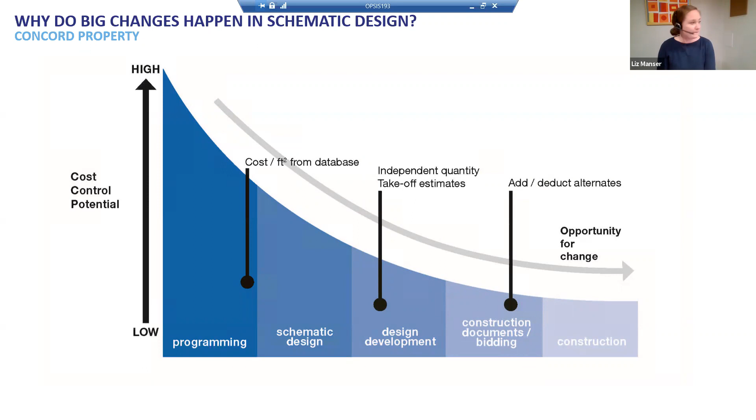This is another graphic of schedule, but I really wanted to use it to talk to you all about the touch points we've identified to come back and talk to the task force group. We've picked 6 times, but they're not evenly distributed through the design schedule. They're really more clustered towards the front end, because that's when the design is changing the quickest, and we want to make sure we have enough feedback from you all and keep you in the loop.

So the way we've broken it down is 3 task force meetings during schematic design, then 2 task force meetings during the next phase, design development. Then we'll have a little break and meet again during construction documents, where we can see where the project has ended up and where the designs landed. And obviously we'll all meet again during the groundbreaking and grand opening.

So just to give you an idea of what we're looking at during those 3 meetings identified for SD, and what the topics of conversation would be: today we're in the yellow meeting, the beginning of SD, where, like Doug said, we're going to review the comments everybody made at the end of the master plan, both from the task force, from NCPRD, and from the library, and share how we're starting to respond to those and how they're affecting the design. We're also going to select the sustainability subcommittee member.

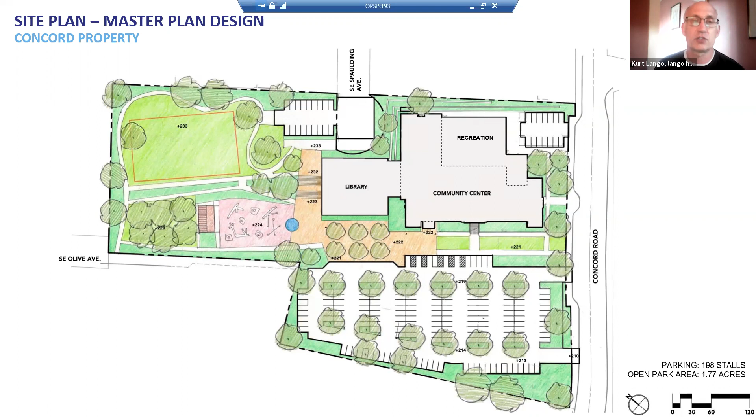So looking at all of that, I think the next plate shows a little bit about what some of the challenges are. Each one of these lines represents a 1-foot contour, so there's about a 20-foot grade change from one side of the site to the next. And we're having to meet up at the property line on all 4 sides, so it's a bit of a puzzle trying to get it all to work together.

We're also trying to balance the cut and fill on the site, so we don't want to haul off a lot of dirt at great expense, or bring in a lot of dirt at great expense. It's a balancing game we're looking at right now, just starting out, and it all seems to be working so far in creating accessible areas and accessible ramps where we need them.

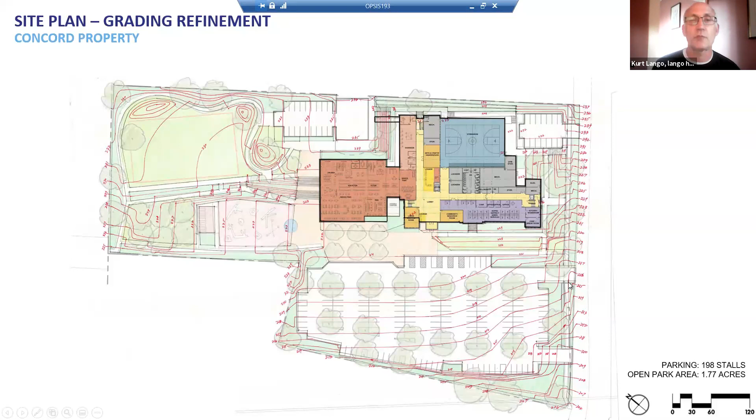I think early on there was a lot of discussion about creating an inclusive play area. What that means to us is creating play elements that serve children of all ages and all abilities, creating areas that might be a little more sheltered for kids within the range of autism, and creating areas that are accessible for kids of all mobilities.

This is a diagram that shows, within the dark outline, the area at the ground level of the Concord School. In purple is dedicated space for NCPRD, and in the light rust color is dedicated space for the library, which is about 3,000 square feet. In yellow is shared space between NCPRD and the library. Totaled together, that's about 7,000 square feet.

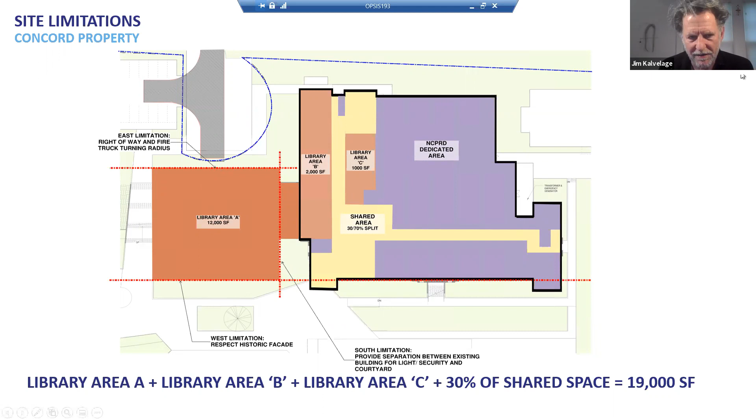So we can continue on here. This is the plan as we left it at the master plan phase.

One of the things we started to look at, a comment we kept coming back to, is how close is this vestibule to the main monumental stairs. The overall notion of having an entry in the knuckle of the L we all agreed to, but the actual design being as close as it is to the monumental stairs, we started to question. Also it being an element that extends out from the facade — when you look at patterns of entries being recessed into the facade, it seemed to us somewhat foreign.

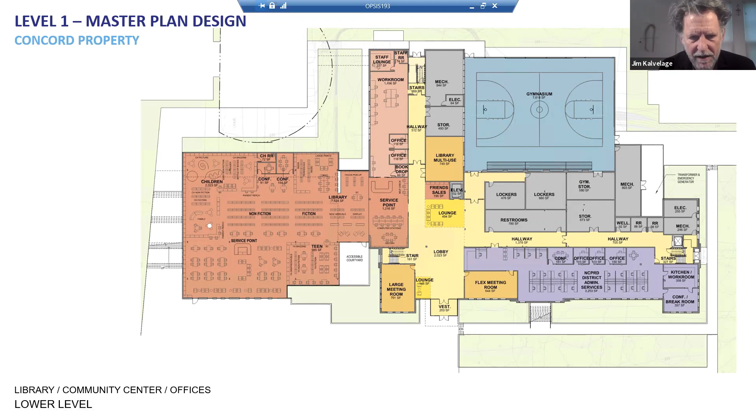Other considerations we'll look at more carefully have to do with the locker room and restrooms layout. But the thing we really want to focus on here is the entry. So let's go to the next slide.

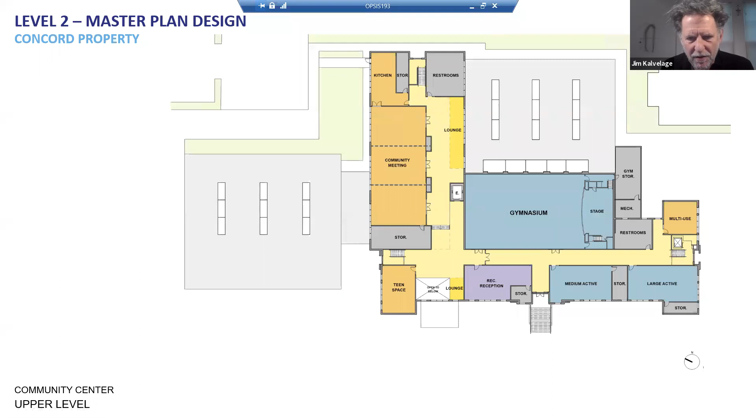Yeah, we can go to the upper level. Subtle changes up here. This is the original plan, and what we've started to do now is really dial in a little more detail of storage needs for the community room and restrooms. We can go to the next image.

You can see the community room. We created larger gray storage blocks that might even have sink and storage to serve each of these three separate rooms, with restrooms at the end of the hallway. We started to even consider, conceptually, the kitchen and its layout, and the potential for a service bridge - more of a pedestrian bridge where you could pull up behind the library and a caterer could bring food directly into the kitchen, since that's up at the upper level. So that's a consideration we need to think about.

And then the lounge area will overlook the gym space below. Other considerations we've given are a second means of egress into the gymnasium - there might be an entry door into the gym, and as you come up the stairs and look straight across you see that entry door. We're also providing after-hours security to the south wing of the upper level, making sure recreation staff have really good monitoring and supervision, something we talked about before. They can also monitor from the monumental stair if the doors are open, with glazing there as well, so they've got an ideal location to supervise this upper level.

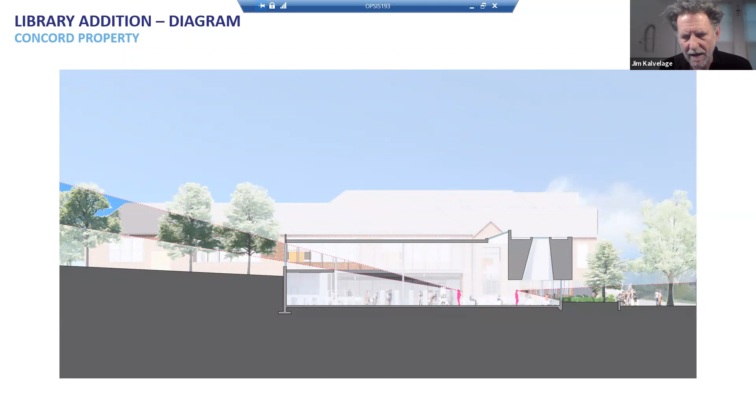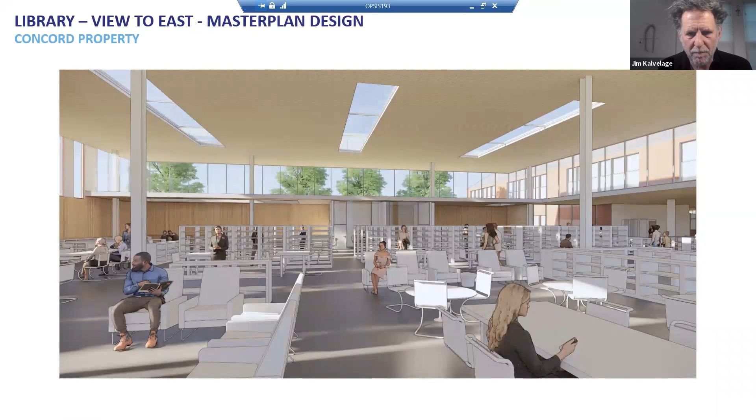This is kind of where we were on the interior view. Should look kind of familiar. We are looking at cross-laminated timber for the roof structure, and then a lighter steel frame that would support that CLT. In this case, we were dropping in skylights, but it was really more of a placeholder.

The next view shows a bit more refinement, bringing that ribbon of clerestory windows and wrapping it around on the north side of the facade. Previously we were showing more windows or solid wall there, so now it's really simple and clear about that clerestory window around the perimeter. As Ray was saying, extending that lower datum line of a ceiling around the north side of the library. This is also starting to show a little more clarity about the structure with steel columns and beams.

We're looking at a moment frame. What that means is the connection structurally between the beam and the column is very rigid, so we don't need a lot of diagonal bracing or cross bracing at the perimeter. Our structural engineers are very excited about how to do this with a more off-the-shelf connector that is very affordable, but allows us to get that rigid connection in a really affordable way.

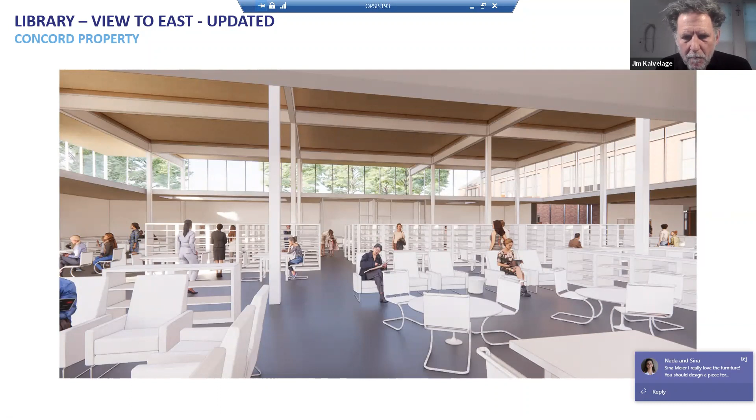And then there's some other views. This is a good one because you can see, looking towards the north and the west, this vertical pattern of windows. That's something we've started to take a closer look at in terms of what is the appropriate character to work with the Concord School.

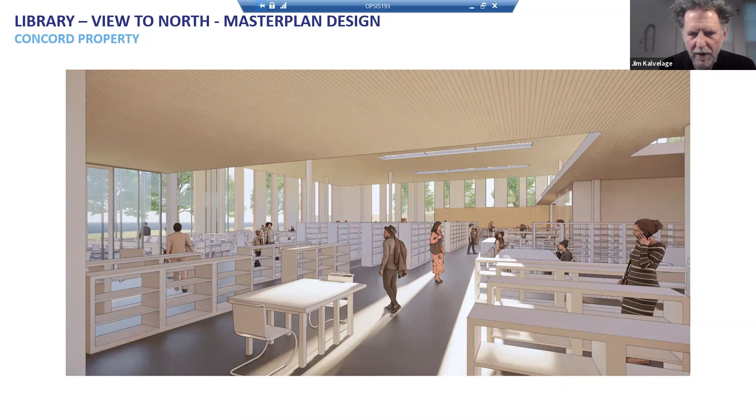So the next view shows the idea of that clerestory window. Let me go to the next one. Yeah, it shows the clerestory window wrapping around that lower extension of the lower ceiling that Ray was referencing. That's part of the children's area, and it terminates at a meeting room. Then that clerestory window wraps down into a 2-story window opening, and that's where we would probably have our secondary egress location.

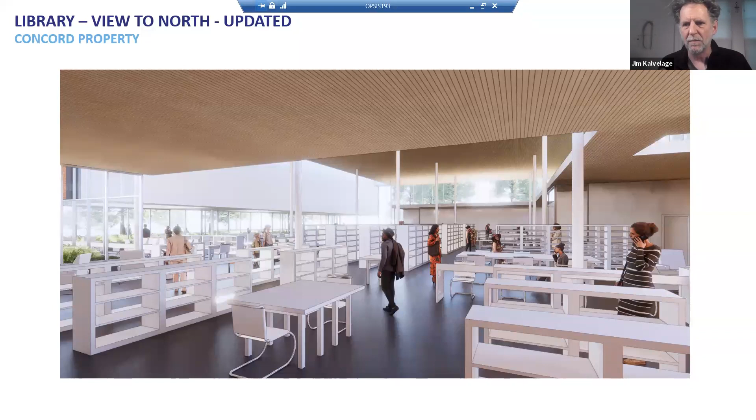And then think about this little bit more of an opaque volume that helps establish a lower datum line and view out to the garden. Maybe that's washed with natural light and a skylight. Also, we think that becomes a really exciting opportunity for art that could be hung on that wall, a very dramatic and memorable location. There's a lot of potential for how that element could be designed.

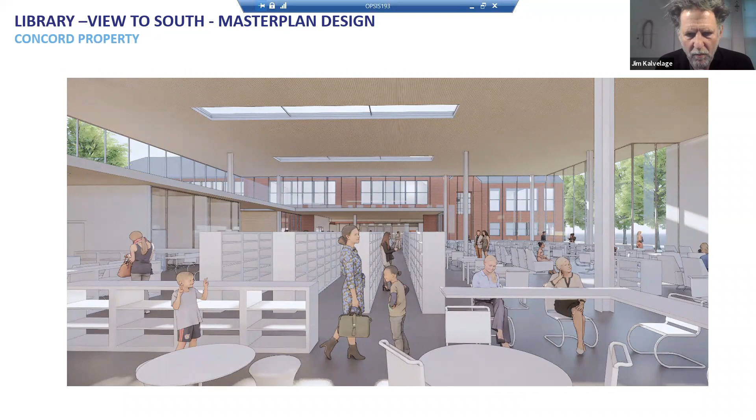Another view of where we were before. This is a really good memory of what was a critique about having too much glass at that corner. And then what we have now, if you go to the next view, is kind of an idea again of that clerestory window wrapping down into that vertical zone of glass, that's 2 stories.

It's pretty cool. It registers right with the stair, the north stair. So it really frames that moment, which is a very special moment, and creates this dialogue when you're going up that stair. Inside the Concord School, you're looking right into the library. So we think that's a really special moment, and how light could come down against that gallery wall, that lifted up levitating wall.

And then you can see the kind of intimate spaces that are created looking into the garden that wraps around that zone of the library.

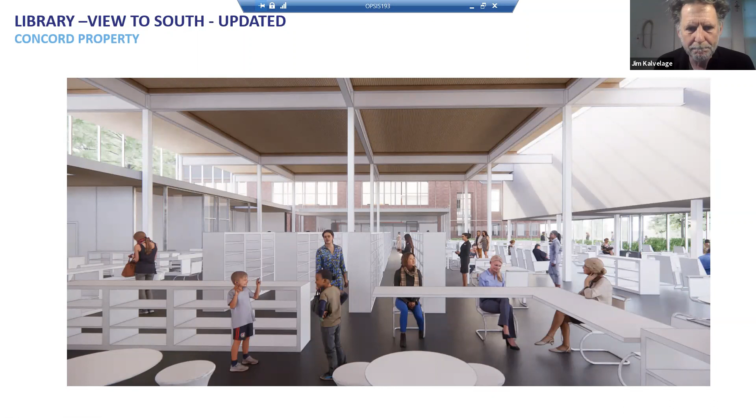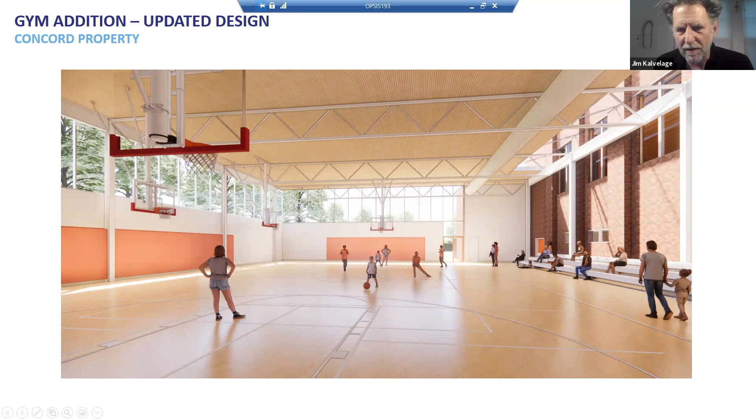This is a view of where we were before of the gymnasium, and it has similar qualities to what we're showing in the library, with the high clerestory windows, solid walls below. This is suggesting that we probably aren't going to need additional skylights. If we put a skylight next to the existing Concord School where the gym is, that's really exciting because you're getting all that light coming back into the existing gym, but it also balances the light in the gymnasium.

So again, we'll be doing daylighting studies, and we also realized that we have a fairly sizable window facing south. So that's something we're going to be studying carefully to understand how to diffuse light and not create a glare situation.

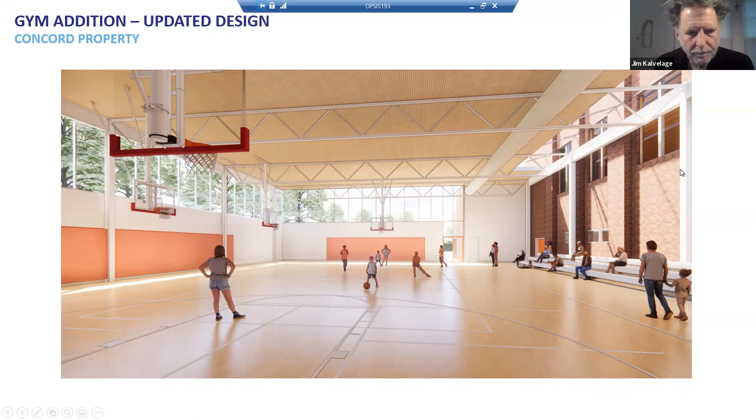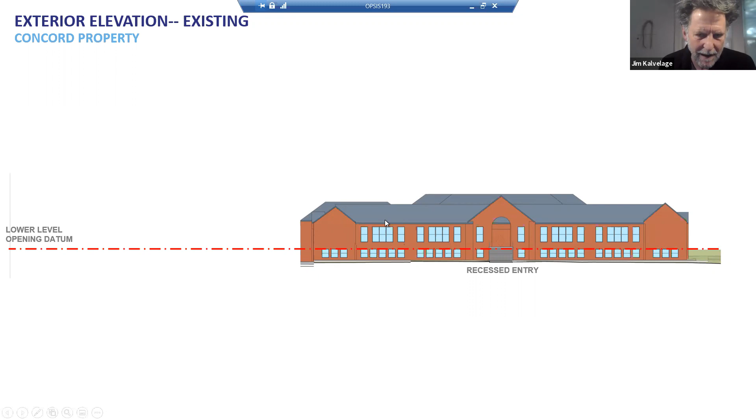We think that's a very important aspect about proportion and what makes this building really unique. So how do we start to relate to that? Well, here was where we were at the master plan. The idea, as we look at this comparison, we thought we were kind of missing things. Here we were trying to replicate vertical patterns of brick that, from our standpoint, don't really pick up the scale of what this building's about.

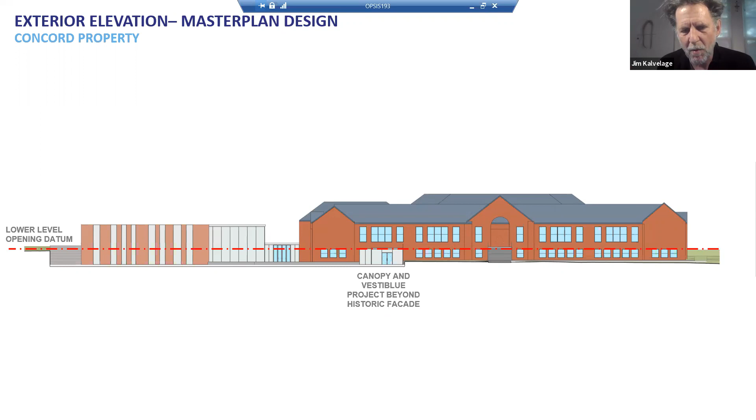In some ways it starts to become, it tries to recall pattern, but it's like, well, which pattern do you like more? It inherently starts to create, in some ways, a more competitive relationship, which we don't think is right.

So this is kind of what we're looking at now, is moving that shared entry further away towards the north. So it pulls away from the monumental stairs. It carves into what is a solid, primarily solid facade, and picks up this lower datum line, that red dashed line. That removal of that portion, which is only a few windows, starts to also set up a gesture and an orientation towards the addition.

And then to think about really picking up that lower datum line within the addition of being glass, and having a more solid wall above. To think about that as an opportunity for creating a really interesting brick pattern, something that may not be the same brick pattern, but there's a texture to it, there's interest to it, and it starts to create a dialogue back to one of the more signature moments of the Concord building. So being sympathetic, but being different.

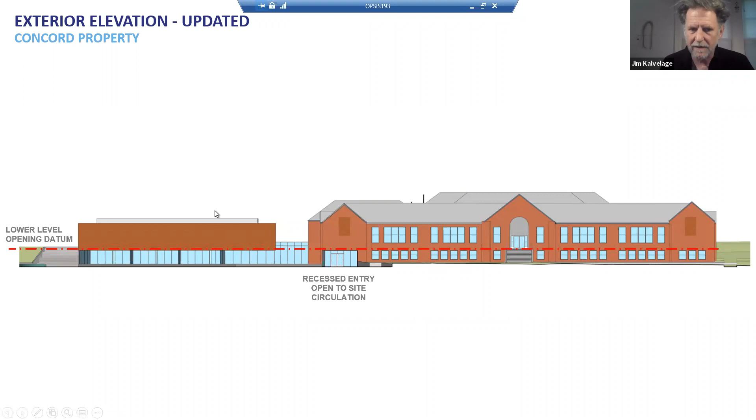You'll start to see what that means in some other views here. So this was where we were before. And then this is where you see it starts to happen, where this entry now is carved in at the corner, and the dialogue between that datum line of the new entry and the library addition. It's obvious that they're joined together.

That was actually an important point that Matt Davis, historic architect, brought up — how is it clear that these additions were done at the same time? That's actually something that SHPO would look favorably upon, is the clarity of that. He was actually very favorable to this particular strategy and approach.

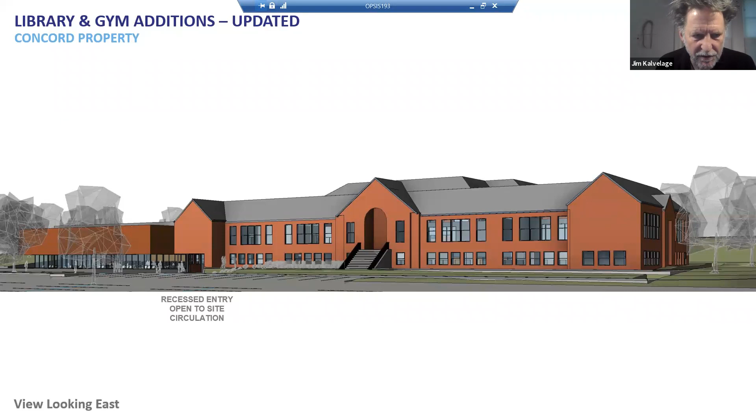And then the next view shows what happens, where can we take these seating walls and start to organize them where the landscape and this bench wall really draws your eye to that entry in a dramatic way, retains the integrity of the windows next to the solid facade, and then sets up a planter wall that extends around the library addition — and the dialogue obviously between the library addition and the entry.

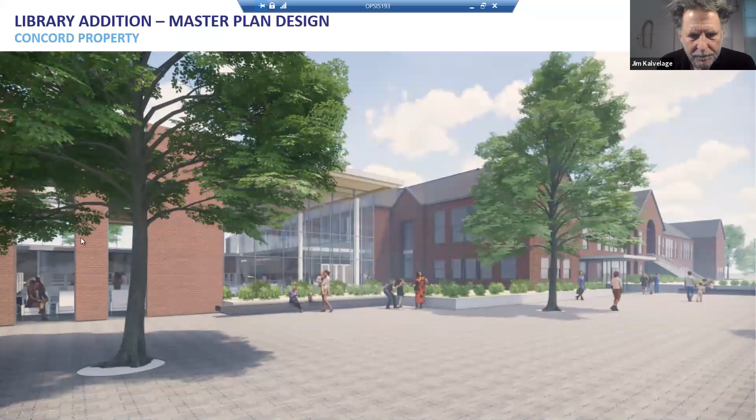Where we were previously, and then the new approach, which, as you can see too, the idea of bringing more landscape into the experience, really the feeling of the park wrapping around the library. That tree, maybe it's a larger tree, it could be an oak tree.

Seems like that would be very appropriate and symbolic for the Oak Grove Library. You can see how the planter wall could become an opportunity for seating. There could be other loose furniture, park-like furnishings that make this a really exciting space. You can see into the library, but the people in the library don't necessarily feel like they're on display because there's enough landscape and buffer between the two.

And so we're excited about what that means as well. And then the inviting nature, this is kind of what it would feel like from the drop-off zone, walking back towards the library. So the gesture of that entry really feels like it's about a rapport and a dialogue between that new entry and the library addition.

And that's kind of where we're at. And I'm going to stop sharing so we can all chat about it. But if there's anything else that anybody wants to go back and look at, just let me know.

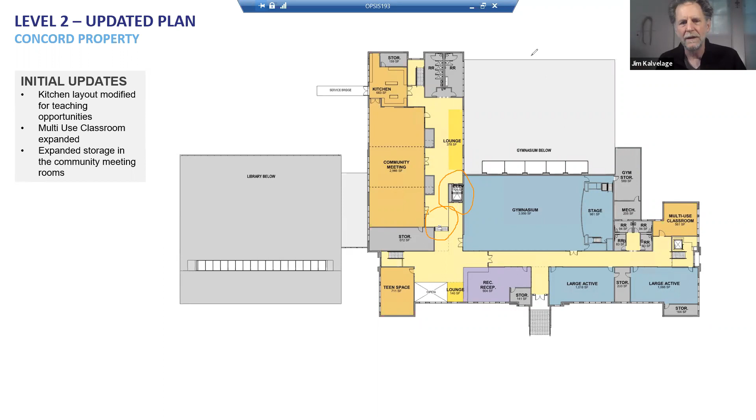This is a good drawing - that's the white box with an X through it, that's the elevator. The addition wing is lifted up a couple feet higher, and there's a ramp there. So instead of providing all this real estate for a ramp, we're using the elevator to make that little partial stop. You can see there's stairs, but you could go into the elevator and it'll take you up just 2 feet, and it'll also take you all the way down to the main level. We're using it to address 3 different elevation changes.

I was curious about bringing books to events in the community room or even some big ones in the gymnasium - having to bring books upstairs is hideously painful and I don't want to go back to that life. Noise reduction for the gym - I just want to constantly mention noise reduction because books and basketballs are a bad combo.

I know this is too early to think about, but the trend right now is toward laminate flooring or wood flooring, which is so noisy. I don't know if you've been in new restaurants that decided on no carpeting and no noise mitigation - within 20 minutes I have to run out, I can't eat here. I know carpeting is a nightmare and a pain to clean, everyone spills coffee and children throw up, but if it's not quiet in the library, nobody will want to read in there. So whatever we can do to make it quiet and not annoying.

I was looking up 1930s libraries online, and they have that cool black and white diagonal linoleum flooring in some libraries. It looks kind of groovy - something to think about. That's it for me.

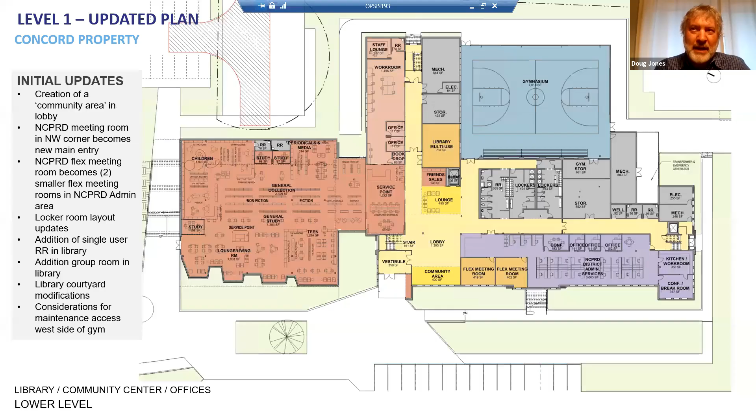Are all of them gender neutral? I don't have an issue with that necessarily, but if it means lots of private stalls, I'm a tad concerned about security. Some people, if they get too much privacy, don't always do things they should be doing in those kinds of spaces, if you know what I mean. Oh, totally.

This is just a first pass at it. We'll probably show 3 or 4 variations. We just did that on Gladstone with a very small library, but there's a lot of different ways to think about it. We're not suggesting one way or the other, but you're raising good concerns, so I think it's something we're going to be looking very carefully at. This is just one layout, but there's lots of ways to create the restrooms.

There's different opinions about all gender inclusive restrooms. It's relatively new, honestly, so we're all kind of learning from that, what works, what doesn't.

We do know from doing these in other schools and public buildings, once you start to get 4 or 5 of these individual stalls, you definitely need to have 2 ways in and out. You do not want to go into a space like that and feel like you don't have another option to get out. So that's a kind of safety concern we've heard, and really good lighting.

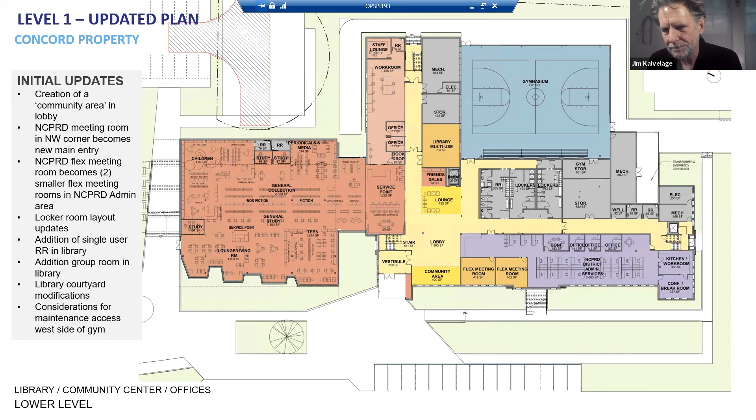I see on that floor there's the ones that are next to the locker rooms, but then there's those couple other ones down at the end there toward the south end, towards those stairs too. That one's interesting, because the ones by the locker rooms have, yeah.

The reception area for the NCPRD is there by the ones by the locker rooms, but I don't know if there's any sort of line of sight that a staff person would see towards the restrooms down at that other end. I don't know if those are meant for something different, or if they're staff restrooms, or not.

The building's long enough that we could get away with just using restrooms at the community wing, but you may have the recreation wing operating independently of the community wing. So having some restrooms close by, if you're working out and ready to go to your yoga class, and you don't want to walk all the way around the building to use the restroom, is really important.

We are thinking the corner of the program rec offices up there will have a view down the corridor. They're not going to look directly into those restrooms, but they'll be able to monitor people kind of coming in and out. That's going to be something we're just going to have to continue to give more thought to.